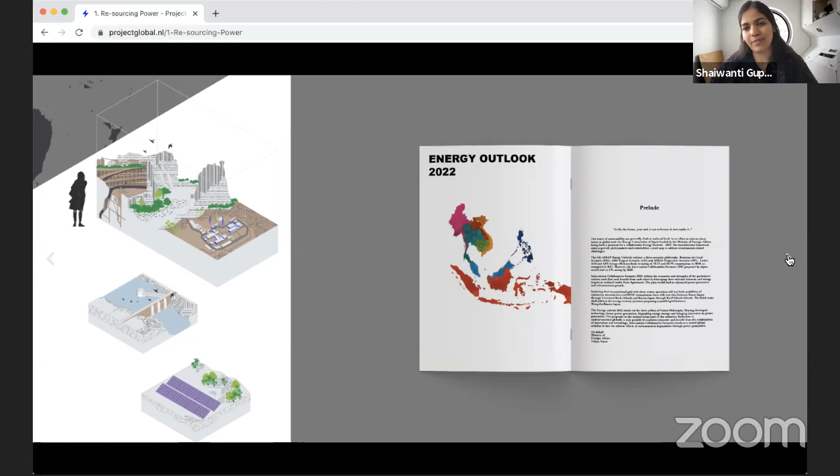So the project sits in the framework of an energy outlook 2022 and brings in the discussion through these models. So what we now do is adopt the voice of Japan and propose ways to deal with an energy crisis in Japan's own diplomatic way. So this report provides an international framework for a roadmap to address these environmental related changes.

The ASEAN report has always looked at three scenarios: the business as usual scenario, the ATS target scenario, and the ASEAN progressive scenario. But Japan proposes an integrated collaborative scenario where countries need to come together to form a better global energy situation.

This is done by proposing the first pilot project of a transnational grid, proposing three routes between Japan and Korea, Japan and Russia, and Japan, Russia, and Mongolia, to look into different modalities through which energy can be transported, looking into questions of security that the nations will come up with. This can help all the nations share their resources and provide for a better energy transmission between countries.

Low carbon emission is one target that needs to be met, and sharing technology becomes the first pillar of this scenario. So Japan proposes to give out its technology for the first nuclear power plant in Australia, which it proposes to locate in the Ranger area in Kakadu National Park, home to the Ranger uranium mine, which suffered losses after the Fukushima disaster. This project can help transfer this technology, help revitalize this uranium mine, and also the area around Kakadu National Park for environmental conservation and other purposes.

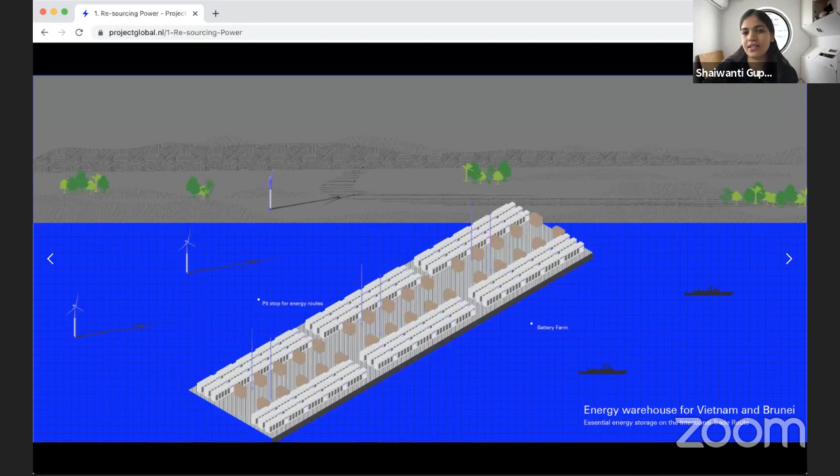Instead, Japan can come in and provide technology and support for building solar farms, and can also help in experimenting with new ways of energy transfer through hydrogen fuel cells. Energy storage also becomes an important question in this discussion, and it can be done by proposing projects of energy warehouses, where Vietnam and Brunei form a very important location between these countries for energy transmission.

There's now a need to bring the world closer, which can be done by providing an innovative solution for a tidal power port in Mexico. As we know, Mexico is looking for new ways and investment in its port to increase its export and import. Japan can help and provide these power ports and experiment with tidal energy.

So this is how the project sits.

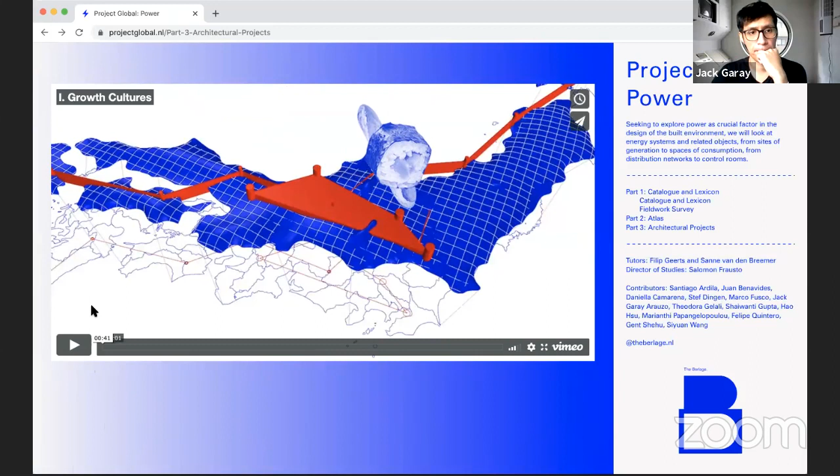Okay, so the next group of four is named Growth Cultures.

On the island, where space is limited, growth as a noun poses a paradox. However, this paradox also stimulates various forms of tackling it. So this group's understanding of growth ranges from its biological connotations, systemic or even philosophical, and ultimately spatial. However, growth also suggests that there are circular processes involved. So to some extent, this group also investigates the metropolitan loopholes so that it can reconnect them back to the systemic loop.

Now we start with Muttsu no Rūto, an Algae Archipelago. Muttsu no Rūto is a Japanese word which means the 6th route, and is basically an appendix of Gokaido, which were the 5 main routes linking Tokyo with other major cities.

Now, what really fascinated me when I was in Tokyo were these in-between gaps. To pierce through Paris is basically to create a boulevard. However, to pierce through Tokyo one simply ought to make a house. These gaps are a consequence of earthquakes. They're a mechanic translation of natural phenomena, basically. However, in a city that is suffocating with signs and edifices, they remain the only breathing pause.

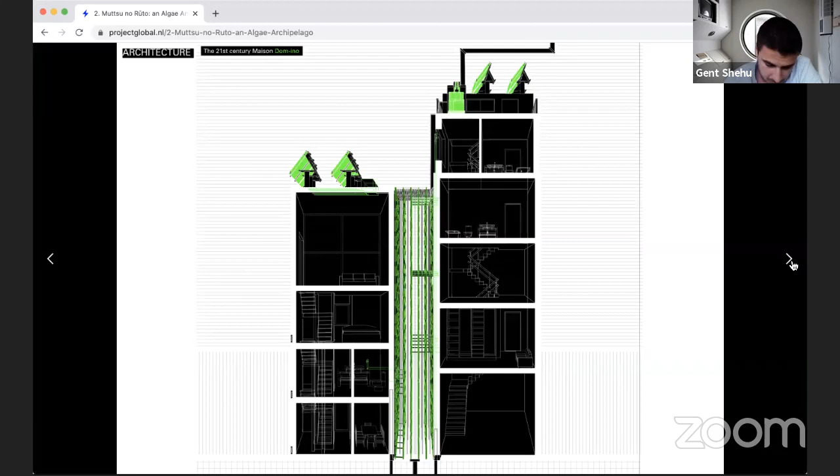Now, this 21st century Maison Dom-ino, well, basically it is with this new consciousness that Tokyo establishes its biological revolution in which photosynthesis serves as the modus operandi and algae as its most adored and loyal plant.

An algae infiltration means that there is a benevolent virus, basically, which enters systems at different stages, only to make them outperform their old industrial mechanisms. Algae systemic identity rests in quote-unquote circular processes, converting what our cities expel into sustainable raw materials and nutrients.

Now these algae curtains are basically made from Photosynthetica, which is a studio which deals with algae. But so basically the originality of this project rests not in its innovative assumptions, but rather integration. So basically all of these phenomena have been proven scientifically.

And the way this project implements itself is from the small scale of architecture, then to the systemic scale, which it links to other systems, and ultimately to the territory of Tokyo.

The way this system basically becomes implemented is in the distant island of Niijima, which is 163 kilometers from Tokyo. However, what is interesting about this island is that it has been a ground for experiments ranging from former launch sites for sounding rockets to today's TEPCO's initiative for sustainable energy developments. It's also interesting that in this island there are 10 to 20 earthquakes with a magnitude of 5 in 1 year.

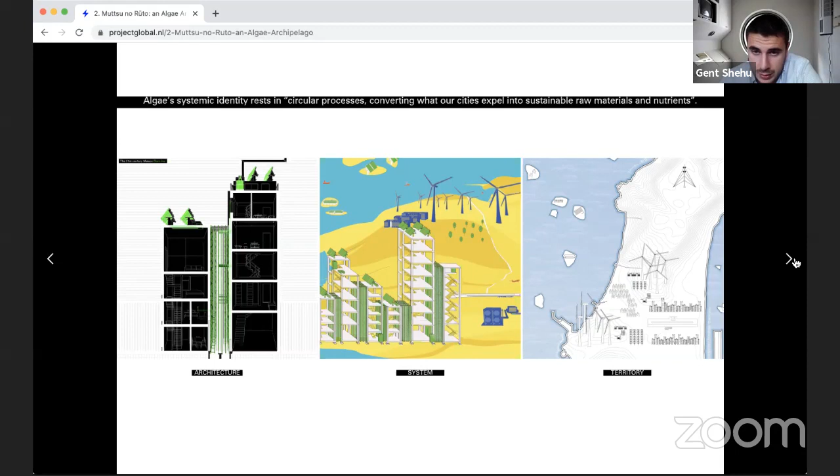This is Niijima island, and we can see how this system can work together. So basically what TEPCO does in Niijima is installment of wind turbines, and then it links to the batteries. But also there is a suggestion to use algae photovoltaics, which also link to the storage of energy. And this system basically becomes part of this algae infiltration, as I say it.

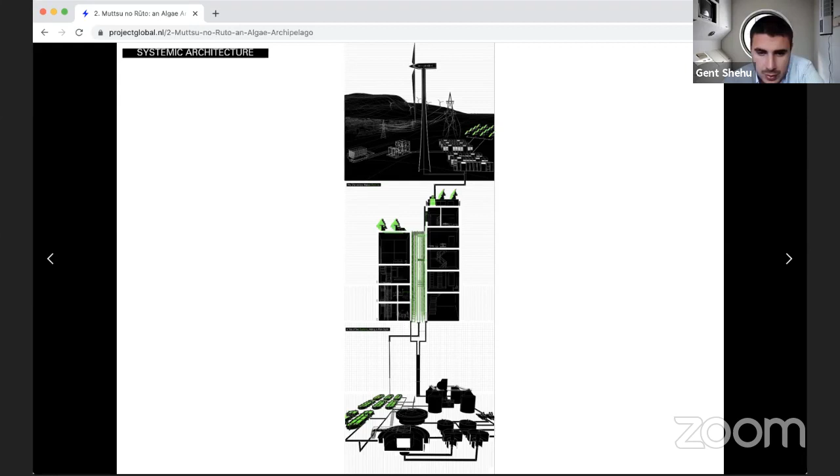Now the systemic architecture means that in order to make this system work, studies suggest that they need to be integrated into major and the general framework of power production or wastewater treatment. So basically the wastewater treatment, it's also very useful to infiltrate algae because it has many environmental benefits, but also it reduces the whole process by 50%. So basically it makes it way easier to treat wastewaters.

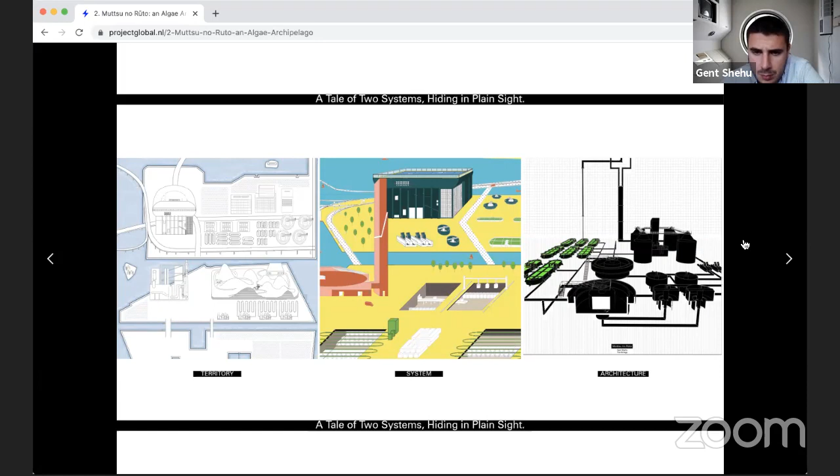Now, it is really interesting how the system actually works in Tokyo, and what would happen if algae infiltrates in this system. Now I call it a tale of two systems hiding in plain sight, because what happens in Japan is usually when we have these wastewater treatment plants, everything happens underground. And what you see above ground is merely parks or tennis courts and people playing.

So in the man-made lands of Tokyo, because basically these are mostly situated in the new man-made sort of islands, which are also used as landfill disposal sites after certain things are being incinerated. So basically in these man-made islands of Tokyo, all kinds of imaginative stories unravel. One might play tennis above the gigantic circular objects of the wastewater facilities.

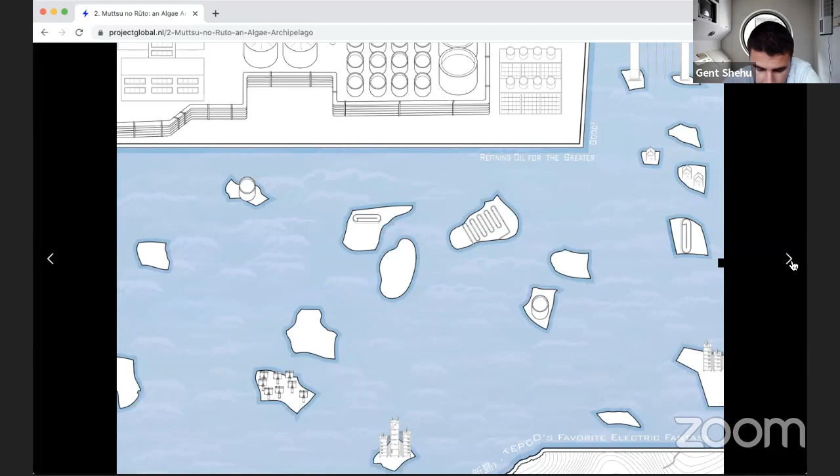Now, the fractal laboratory, the final stage of this project, is nothing less than 1,000 islands dispersed throughout Tokyo Bay, each testing 1,000 strains and providing its necessary ambient. It's an archipelago within an archipelago that tests algae on all possible systemic scenarios, because in a complex organism such as Tokyo, the laboratory becomes a place of multiple simulations.

Now, finally, Muttsu no Rūto considers integration rather than innovation as the basis for urban resilience. It's not about a single system, it's about a multiplicity of them forming a non-hierarchical structure and feeding on the waste of one another. Its extrapolation in 6 basic systems forms the basic framework for the future of Tokyo. In this regard, the delirious Tokyo is a thing of the past. The photosynthetic Tokyo is the ultimate future.

This contribution investigates how Japan utilizes its national natural given of forests, which cover 60% of the country and used to be the center of traditional economy.

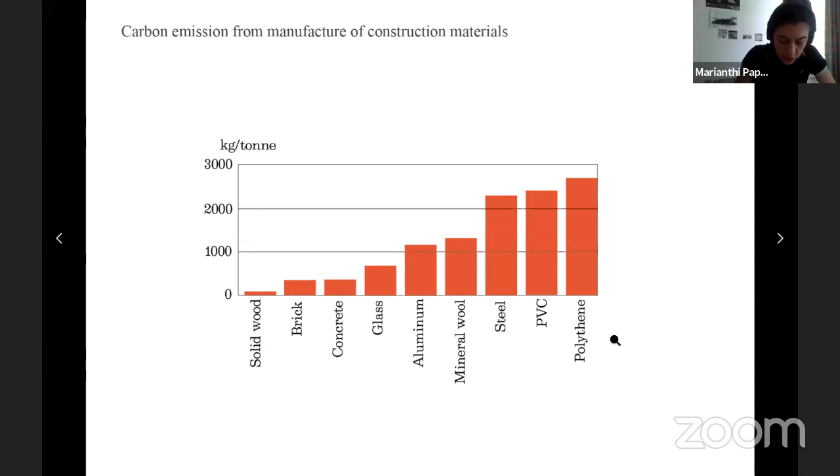Circular economy is not new to Japan as it is linked to traditional ways of living, such as the satoyamas.

Thirdly, if we take a look at the domestic economy and the fact that domestic needs of timber are met by large importation from foreign countries, we assume that this amount could have been produced locally.

Another issue is that Japan has a very living tradition of timber applications and techniques that need to be strongly reframed in the contemporary way.

So the above generates a multifactorial research scheme where opinions and contributions from various experts are much needed. There is need for collaboration and focused research at different levels. This project aims to frame and accommodate such operations in the form of a network dispersed around the country, most particularly in areas with extended national forests and tradition in timber work.

The building program of those institutes is revolved around 4 main fields of research: building techniques, sustainability, design, and production. Each of those 4 fields has relevant labs, research facilities, and workshops. You can see all of them in this diagram: the wood shops, the workshops relevant to design, innovation, circular economy, the labs that deal with marketing and local production, forest management to control the growing rate of forests, and so on.

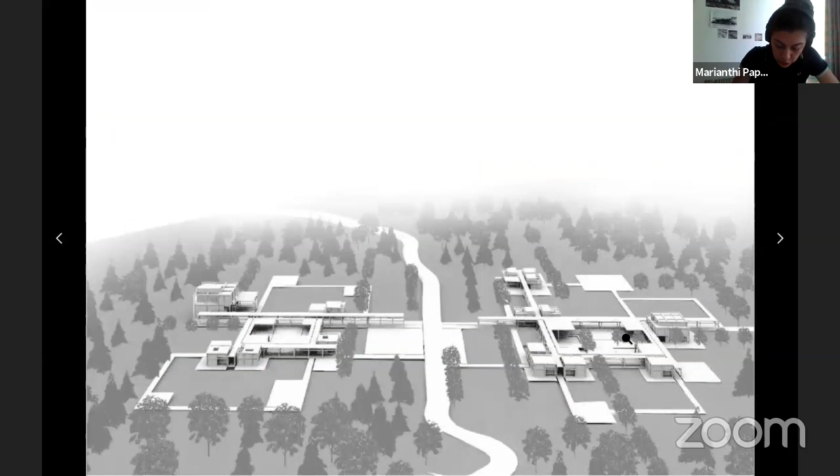The main goal of this master plan was to show relations and intentions rather than provide a detailed master plan—the relation with nature, the kinds of labs and workshops, the idea of a forum, the indication of a campus always in the making are some of the ideas I tried to incorporate here. The campus is clearly divided into 2 parts.

The part of the woodshop, where experts, craftspeople, and apprentices do research by building, and the more laboratorial part, where researchers, architects, designers, forest and energy experts design, strategize, archive, manage, and plan. They are divided for the practical reason of noise, but also because the woodshop generates the rest, therefore it's by itself a very strong sector.

The forum, as the common space of discussion and opinion exchange, is the core of both parts. It's used extensively during summer, spring, and fall, whereas in winter those activities take place in the central buildings of the 2 sections.

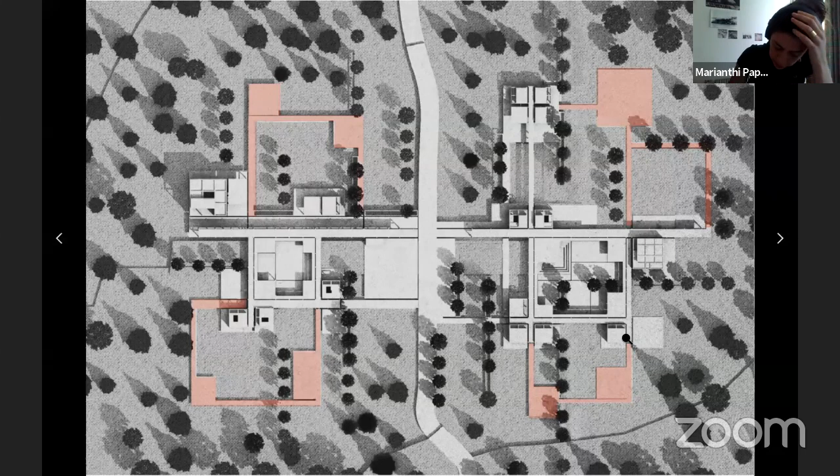The institutes will host local and foreign experts, researchers, and practitioners that will organize various annual thematics relevant to the timber industry. Those thematics will first try to frame the local issues and then connect with a network of other cities to exchange knowledge, statistics, and conclusions.

The network is also not fixed, and it can expand according to the need of additional locations. I'm so sorry, I have some problems controlling the presentation.

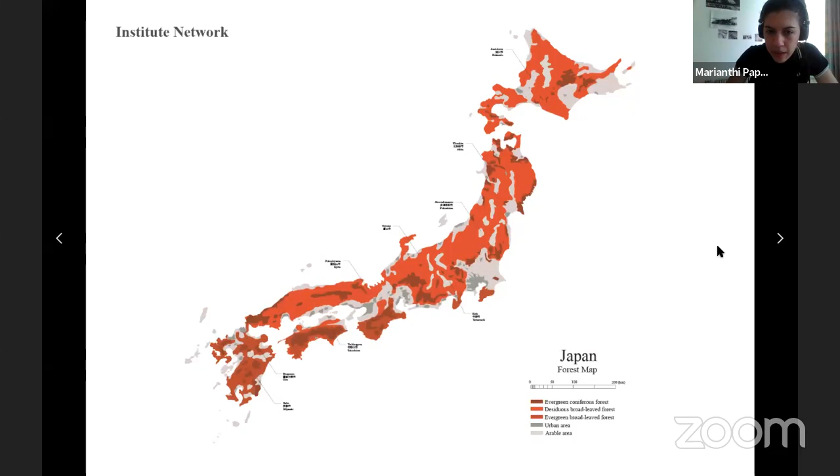Do you want me to continue controlling your presentation? No, I mean, I could not control it properly, so I don't know if I made sense. Maybe the files are very heavy, I'm not sure what's going on, but I couldn't change them. That's the problem, so I don't know what else it could be. Did you show all the slides you wanted to show? Yeah, but I wanted to show them in a proper way, and it couldn't happen. No, okay, don't worry.

So we go on right to the next one, right? Yeah.

So the next project is mine, and it's called Shokuniku.

The Shokuniku market in Shinagawa is the only slaughterhouse in Tokyo, which means it supplies meat to the whole Tokyo area. Its location is quite central, close to Shinagawa train station, surrounded by shopping areas and high-rise office buildings.

The removal of Tsukiji market makes me think of the same question for Shokuniku market. Tsukiji was the largest fish market, located in the center of Tokyo. It was removed to Toyosu in 2018, to a relatively outer space. Here are some pictures of Tsukiji market and Toyosu.

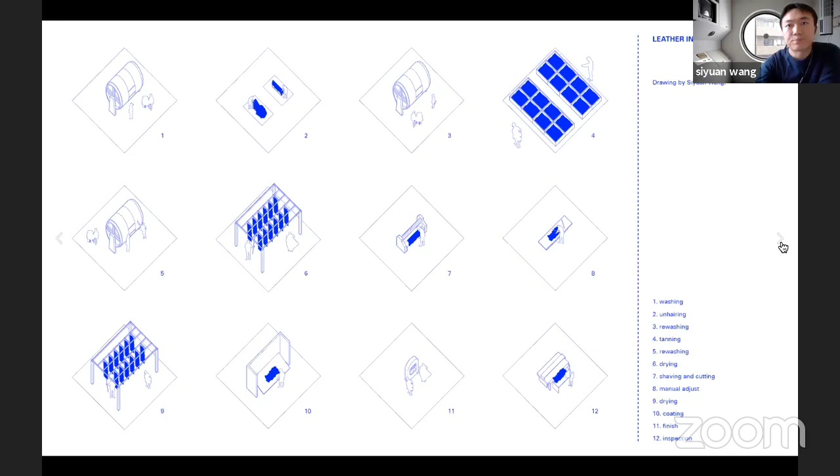I also searched some information about the slaughterhouse. It's too bloody, so I blurred some of it. The key image is how they skin the cattle, and there is a chamber to collect the leathers.

This is a proposal for the combination between the slaughterhouse and the leather factory, from the perspective of logistic efficiency between different industries. I think it would be good to bring the slaughterhouse to make a combination with the leather industry in Sumida Ward. Based on the situation of the slaughterhouse and leather factories in Tokyo, I'd like to bring the leather industry close to the slaughterhouse to make a new Shokuniku market, named Shin Shokuniku.

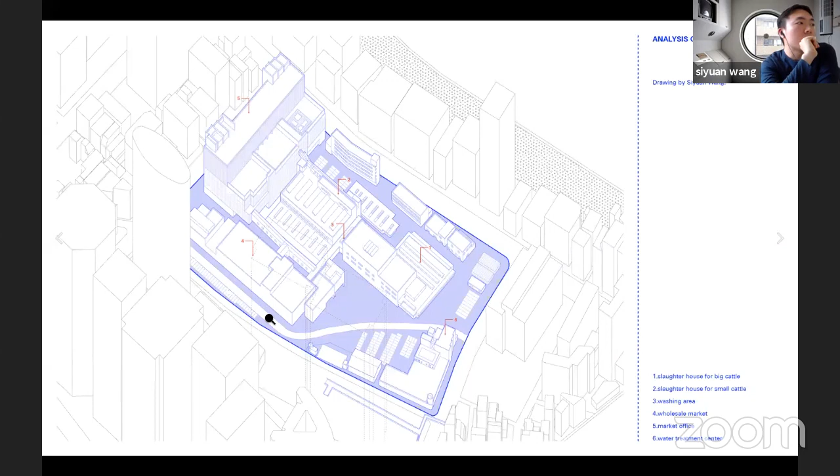For the existing Shokuniku market, there are a slaughterhouse, washing area, market, office, and water treatment center. Considering the high density in Shinagawa Ward, it's hard to develop a new block for the leather industry, so I add the factories on top of the existing slaughterhouse. The factory is connected with the slaughterhouse in the washing area, where they can share water facilities and transport leathers efficiently. The water treatment center of the slaughterhouse would also be shared.

I add meat and leather retail stores to this project. By extending the existing skyways, the stores could be connected with the shopping mall and office buildings around the slaughterhouse. I also attached a visitor path so that people could learn about the process of the slaughterhouse and leather making.

This is an exploded diagram showing the function composition of the slaughterhouse and the leather factory. Here are some perspectives outside of it, showing how people visit the leather factory and watch it.

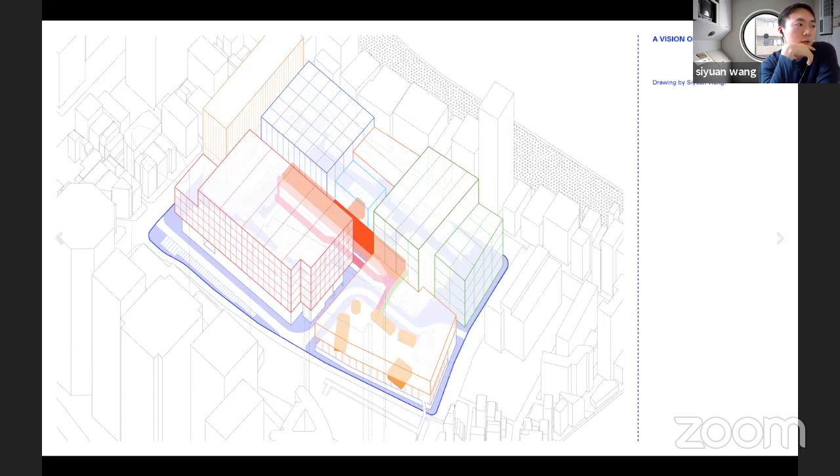Compared with the high-rise buildings around it, the slaughterhouse is quite a low-density block. This gives the possibility to add more related functions to it. So I would give a future vision of making this block a mass of different slaughter-related industries. Yeah, that's my project. Thank you.

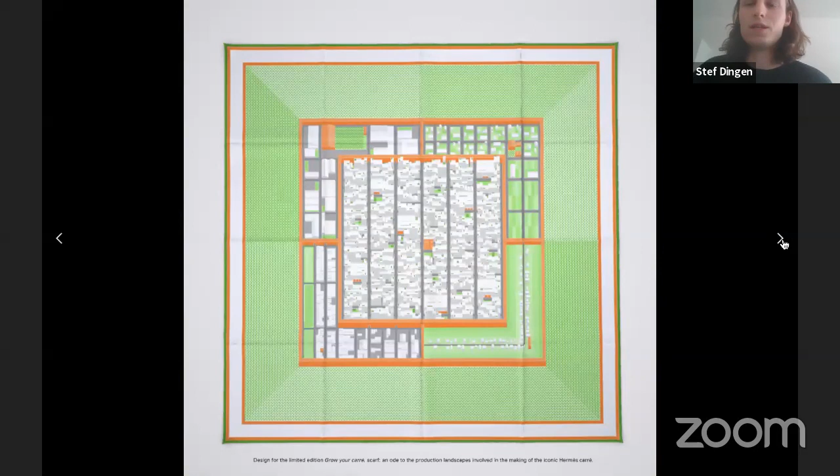Grow Your Carré is at once an evocation, giving insight into the very real disconnect between luxury shoppers in Tokyo and the distant, intensive making of their desired goods somewhere else, as well as a serious solution utilizing existing knowledge, traditional skill, and available space in tackling an admittedly small part of manufacturing locally. By overlapping production and consumption landscapes, Grow Your Carré stimulates an awareness of the scale of this operation and aims to positively contribute to fostering local craftsmanship and a greener inner city, through a combination of an aesthetic language typical for Hermès scarves, and the abstraction of production landscapes within a long-standing ideal city tradition. That which may seem frivolous is dealt with in a highly rational way, without losing sight of the pleasure involved with quality products.

It connects the scale of the urban and the landscape, that of the interior, and finally the object. As such, Grow Your Carré is also an encouragement to look beyond the superficial and to find beauty in the complexities underlying our consumption patterns across a multitude of scales. Thank you.

Do you know Family Mart? Have you ever been to a Family Mart? No? Don't worry, you can find at least 3 Family Marts within 5 minutes walking in Tokyo. It's open 24 hours a day. Anything you can imagine for daily use, you will find it in Family Mart, so don't hesitate, let's go.

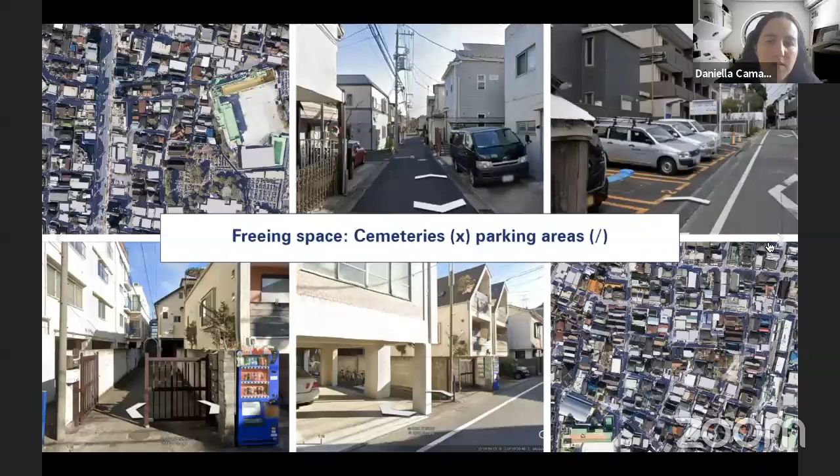At first sight, it might seem that there is no open space in current residential areas, but cemeteries and parking areas act as the back garden of houses. However, walking through their streets, we can start finding small parks that begin to emerge. These parks serve as places to fulfill the strategy for evacuation areas according to the Disaster Prevention Plan, together with the Urban Park Act, which started in 1956. These parks are not much but surfaces with lamps and benches.

According to this action plan for 2020, it consists of advancing projects aimed at strengthening the functions of these metropolitan parks, key as disaster management. So the aim of the project is to frame open space as a structural device, looking for the opportunity to open a centrality within the low-rise residential high-density neighborhoods.

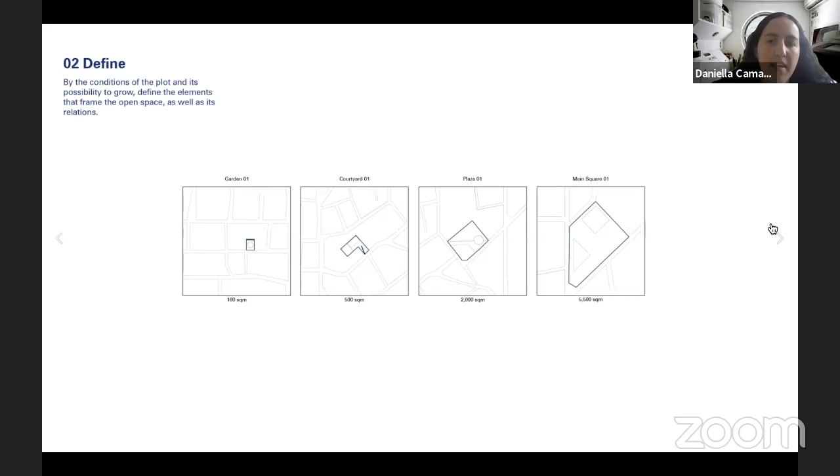The second part is that we're going to start defining these plots by the conditions of the plot and its possibility to grow, and its role in the disaster prevention plan. Technical details are added per system.

First of all, the water garden, which is 160 square meters. It consists of a rainwater collection, which later connects to the main path, a drinking fountain, and a light feature that is produced with the electricity of the plaza.

The second one, the courtyard, is 500 square meters, composed of a rainwater collection pond, seasonal trees, a contemplation slope, and a light feature that is also fed by the plaza.

The third one is the plaza, which is 2,000 square meters, where we find a pavilion with solar panels, where the electricity goes to the inverters and batteries to later be distributed to the courtyard and the garden, a rainwater collection pond, a drinking fountain, seasonal trees, and gathering areas.

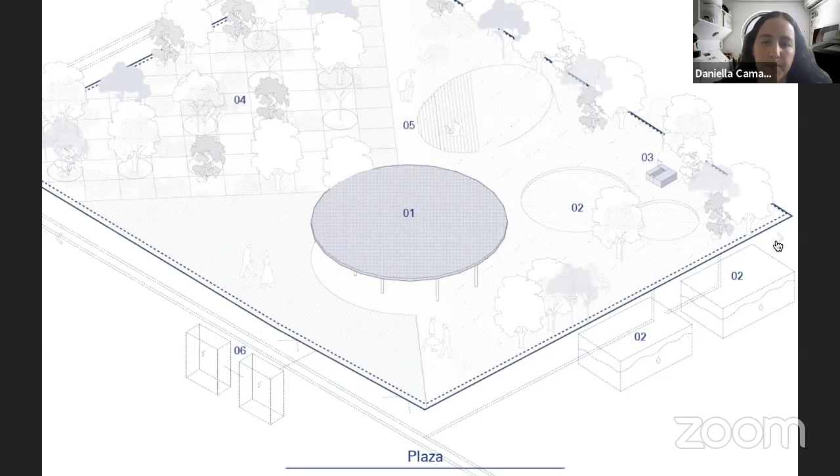And the main square of 5,500 square meters, which contains a pavilion, a geothermal productive and educational area, pumped from geothermal energy, which later connects to the main channel and rainwater collections, and a gathering area.

Making a sequential path connected with existing evacuation paths according to the disaster prevention plan, and adding them with water harvesting paths and electricity production and distribution within the parks, they create a network where elements join together.

The notion of collective structures will allow varieties to coexist and integrate in a comprehensive urban strategy, where shared efficiency, distribution, and generation are considered, which will later be spread around Tokyo's residential area, where individual structures are accumulated in a quantitative manner.

Looking into Tokyo's residential area, freeing its space for its residents' livability and for the city's security, forming an alternative for dealing with collectivity.

Hello, my project is Meta Billboards, and it's basically a system of billboards powered by the energy industry stakeholders.

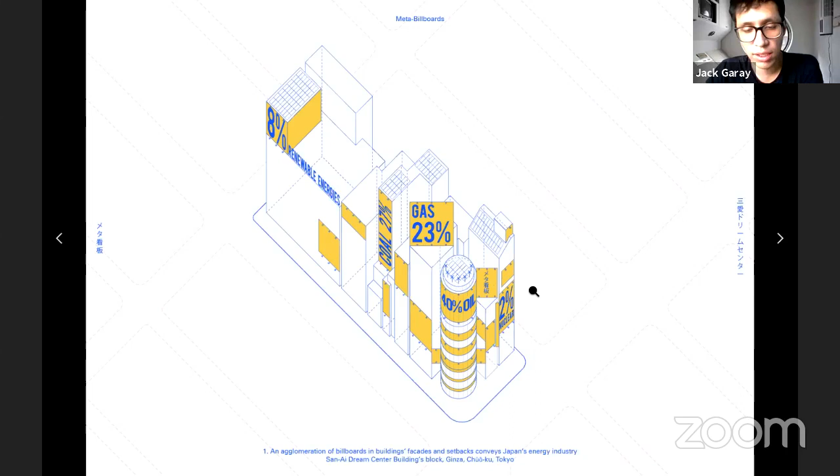The first one is in Ginza. This is the San-Ai Dream Center building, which is advertised as a building that is 100% a billboard, and it's powered by renewable energies. That's why it has solar panels and even wind generation on the roof.

But then, of course, Ginza is a collection of buildings with setbacks and different heights, but all of them have this second layer of billboards on top, taking advantage of the surface and the intricate spaces that they leave behind in between them.

And this one in particular is a speculation on the different sources of energy in Japan, comparing how much they represent in the whole energy consumption, using the billboards.

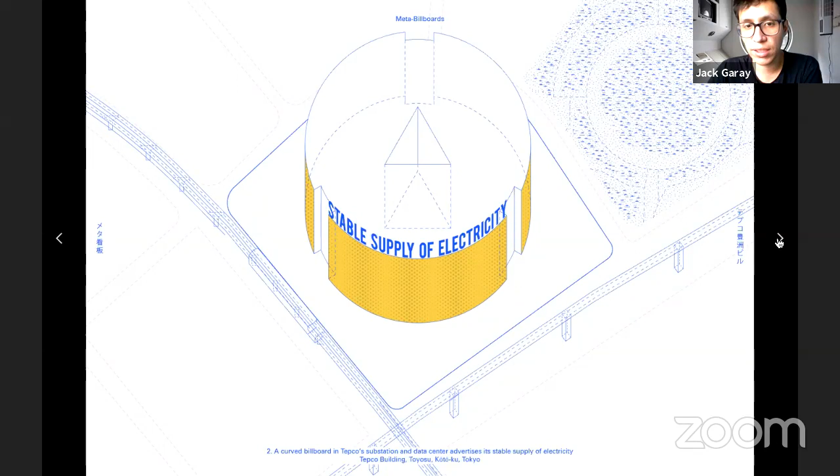The next one is the TEPCO substation and data center, the TEPCO building in Toyosu. This one speculates on how the whole building could be transformed into an LED screen billboard, advertising the discourse behind the corporation, which in this case would be the stable supply of electricity, the smart meters, or the activities that TEPCO is taking into place.

The following is the Fukushima Daiichi nuclear power plant. During its decommission and the putting into place of safety measures, it becomes a visual campaign in itself, with billboards, signs and symbols, with tourists visiting the place, and the Japanese government aiming to convey that the nuclear power plants coming back to Japan are safe now. So in a way, the site itself becomes a political conveyor of messages.

The following is a kind of counter-reaction to the previous one. At the site of TEPCO's Decommissioning Archive Center, the former TEPCO Museum, a giant billboard is installed in the outskirts of the town of Tomioka, less than 5 kilometers from Fukushima. This campaign goes not only against nuclear power but also against nuclear experimentation and usage in other countries.

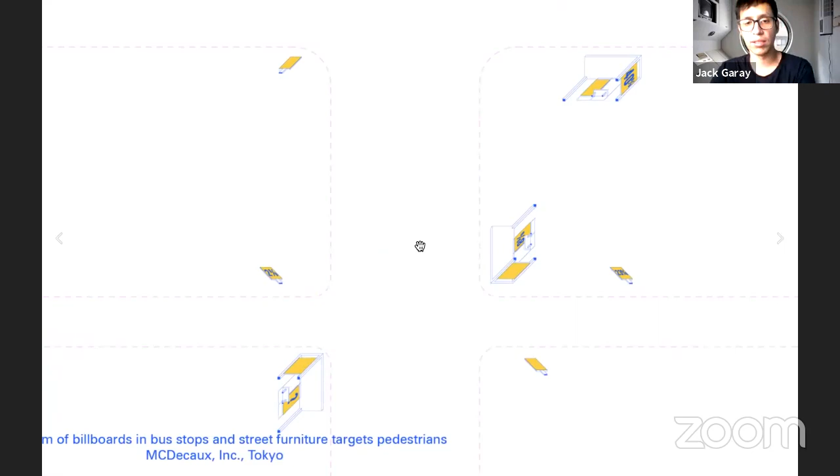In this case, I analyzed MCDecaux as the Japanese branch of JCDecaux, the bigger street furniture advertiser in the world, and how they occupy these kinds of corners, in-between spaces, and public spaces in cities. They have become extensively known in almost every country.

The next one is a system of mobile billboards on trucks that also use the truck's sound as a message conveyor. In this case, it's speculation on the development of the T-Green Multi-Solar, a new kind of facade, from a company that develops facades and systems to generate power through solar energy.

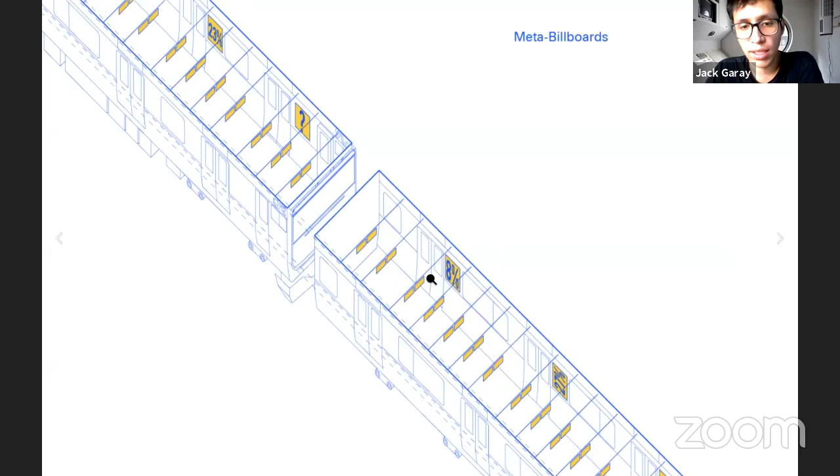Then again, the system focuses on printed banners in the Yamanote Line, but in general on train stations and public transportation in Japan, and how these carriages have become a place where different sorts of advertising happen, from events to products to services, but in this case a more relevant discussion around energy production.

Finally, mascots in Japan are a cute and happy part of the culture, but they have also become a political tool, used by governments and local governments to engage the public in certain aspects. In this case, the character of Pikachu, related to electricity, became part of a campaign all over the world, protesting Japan's financing of coal plants and fossil fuels.

So in a way... I'm sorry, Jack, I need to interrupt. All of you are taking way too much time in presentation. It's already 4:15, and we would like to be able to have a discussion about this work. At this moment, it's not possible, so please wrap up your presentation.

Just to conclude, the image is the Ginza block, a kind of blank notebook where all these messages are conveyed, and in a way the architecture becomes... the billboards become the architecture of persuasion. Yep, that's it.

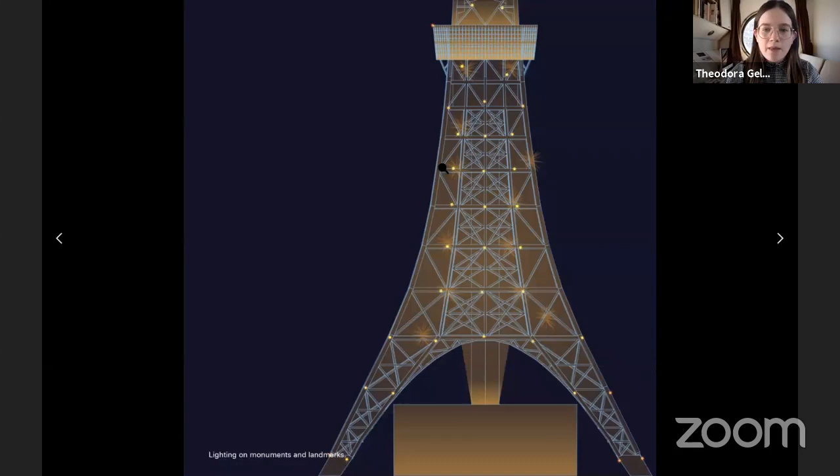Continuing, lighting up a monument or landmark links mainly to entertainment reasons, attracting more people to the site. It creates a feeling of social safety and cohesion in the city, while also creating an identity landmark for the people. Apart from being an attractive type of lighting, it turns out to be extremely wasteful because of the surface it covers and its use, sometimes all day long.

Street lights and street lamps get lost in the center of Tokyo. Being part of the infrastructure, they hold a useful task we all know, but actually noticing them becomes difficult for pedestrians and even dangerous for motorists and other street users.

The image of Tokyo, as we know it, shows digital billboards causing high levels of light pollution, which is a main point of interest. The intensity of light from the thousands of LEDs used on digital billboards is much greater than lighting from conventional signs. Traditional measures of brightness don't accurately reflect this intensity, which makes the digital billboards stand out from their surroundings.

Street signs and street lamps easily cause light trespass, unwanted light intruding into a person's property or area of concern. Not being places of high interest to tourists, these can also be found in near-dark areas and secondary streets, mainly forming a network of dimmer light in Tokyo. Finally, traditional lighting comes from smaller houses or shops, on a smaller scale. These offer a closer look at the traditional light setting of Japan, forming more interesting shadows and engaging more with the darkness.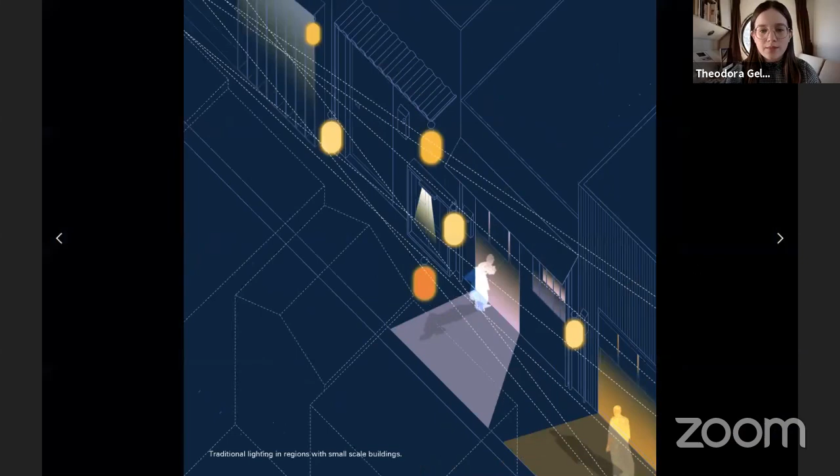In our collective imagination, cities are meant to be bright, but studies show that much light can be detrimental to health. So are cities actually getting too bright for our own good? That's the question. Even though digital billboards use energy-efficient LED lights, with Japan using the latest technology, the sheer number of lights in a single sign and the need for billboards to be brightly lit to be seen during daylight hours turns them into energy hogs.

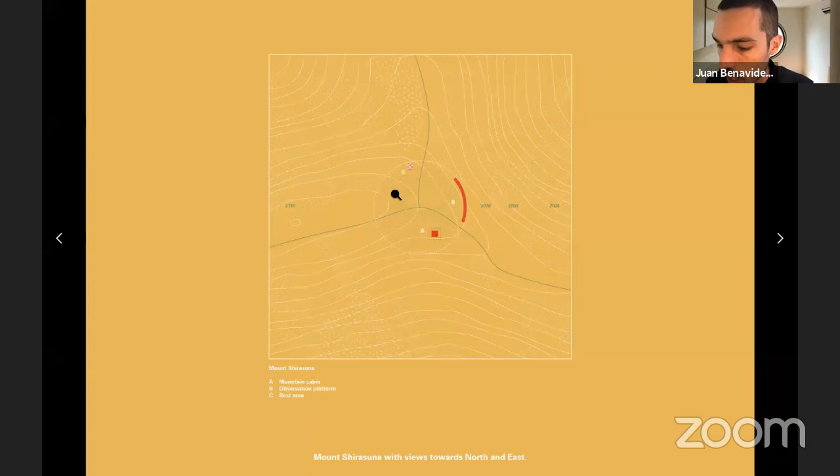The project proposes a panorama in a place from where to look at the energy systems. It is a model fragmented into 3 didactic objects: a mountain cabin, a viewing platform, and a rest area, all scattered within an invisible circle that departs from the shared coordinate.

Views are framed inside the mountain cabin, and tower binoculars are directly pointing to the horizon, suggesting the possibility of looking at a nuclear power plant from afar.

The electric infrastructure of Japan comprises 2 incompatible power grids: the West, that built its grid based on the American 60 Hz system, and the East, that built its grids based on the German 50 Hz system.

While there are enough power plants in each of the grids to supply electricity if there are spikes in demand or outages, the fragility of the system is evidenced when there is a big unplanned shortage of power. While the idea of a unified national frequency is economically and politically unreachable, Japan can only hope to improve and extend their conversion capacity between grids and simultaneously make an effort to conserve electricity.

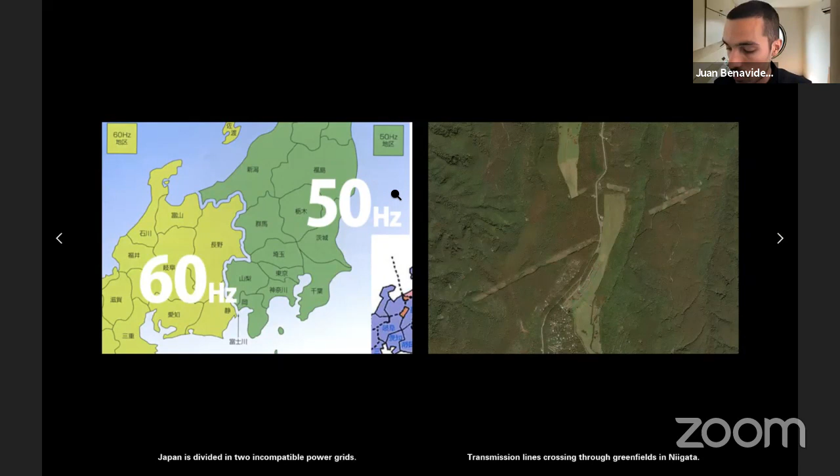The Electricity Expressway evokes the issue of the imminent disaster. It is a prototypical strategy to bring stability to the grid and expand the inter-area power wheeling initiative promoted by TEPCO and Chubu.

The expressway carries 2 transmission lines, one from each half, with transmission pylons every 300 meters that arrive to the new Nagano Tokyo Frequency Converter Station.

A series of renewables, such as power plants integrated to large-scale storage facilities, systems that countermeasure frequency control and balance daily demand and supply.

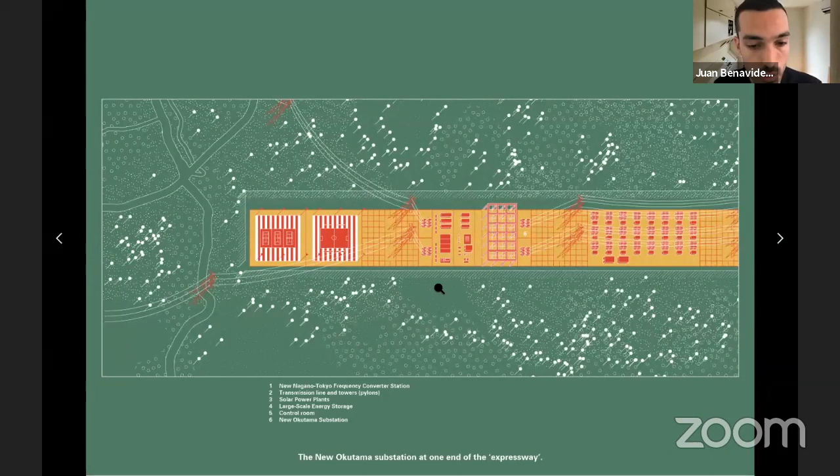A new Okutama substation at one end of the expressway, and a new Kawakami expressway substation located on the other side of the expressway.

The southernmost point of Japan is a flat table reef comprised of 2 rocks that are typically visible 90 centimeters above the surface of the water.

The island of Okinotorishima, with the zip code registered in the Tokyo Prefecture, is an incredibly ambitious project that reflects the country's effort to sustain a territory and the benefits that come with it.

The small rocks entitle Japan to 400,000 square kilometers of maritime territory, a seabed that is believed to be rich in minerals and gas.

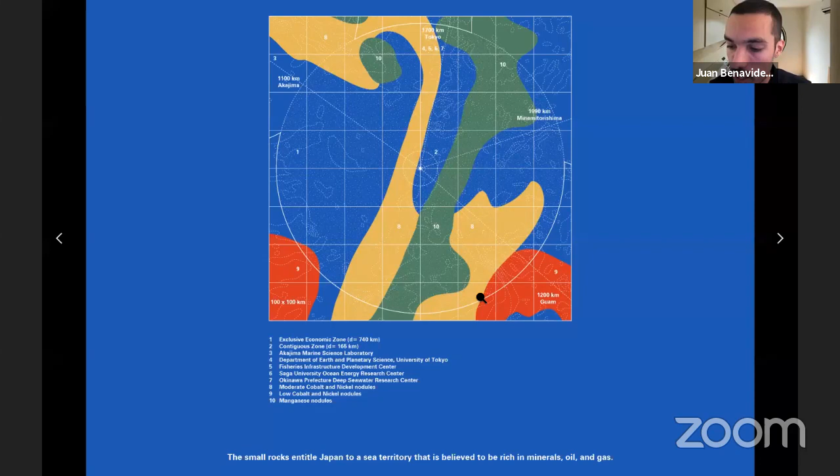Consequently, over the last 50 years, Japan has taken a series of actions for the purpose of islandization, including a lighthouse, an observatory base, a maritime research and weather facility, and a quay to allow large vessels to dock.

With facilities in the neighboring Akajima and Tokyo, it has spent large amounts of money on research for breeding coral reefs, and sent out various ways that could turn Okinotorishima into a natural artificial island.

But perhaps the most ambitious of them all is constructing an ocean thermal energy conversion plant that utilizes the differences in temperatures in the sea to generate electricity.

The Island of Ambitions is an index, a master plan as if everything that was ever suggested would happen. On stage 1, the artificial bank for coral breeding is implemented.

In the middle, dividing the atoll in 2 halves, the sediment control islands direct the growth and spreading of the coral towards the west. Construction for the OTEC begins with a depth of 900 meters.

Stage 2 contemplates the first artificial islet, and installing houses for human habitation and areas for aquafarming are delineated.

For stage 3, Okinotorishima has proved economic activity and introduces accommodation for tourists, a heliport, and deep sea mining facilities to extract oil and gas, as sea bottom resources have successfully been identified after a years-long survey.

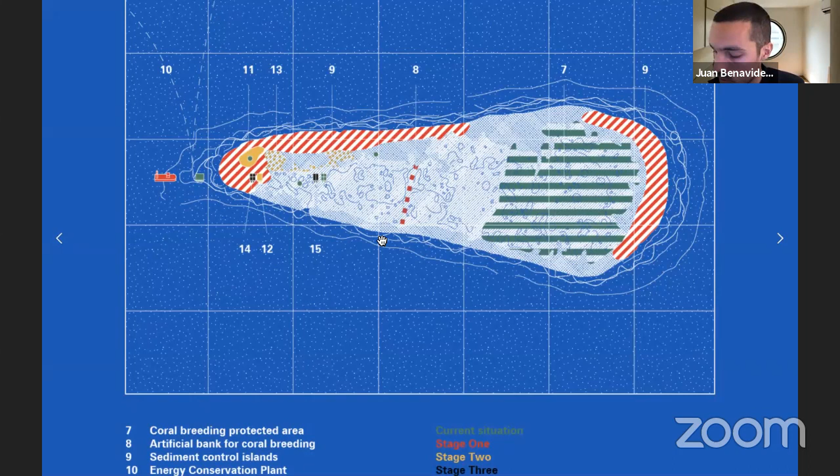The result is a sectional characteristic of all buildings forming a line in a kind of umbilical display. Through submarine HVDC cables, the power plant feeds the rest of the island.

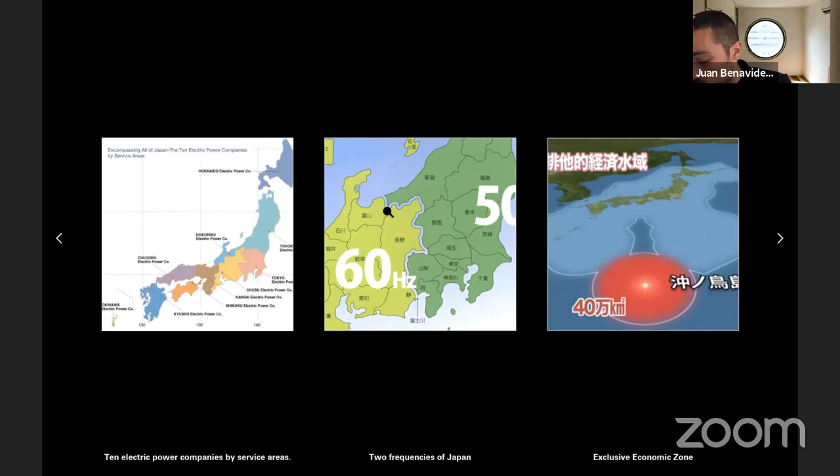The 3 territorial hinterlands of power intend to bring physicality to the invisible lines by using as a vehicle, as a tool, the topics and discussions these specific points trigger.

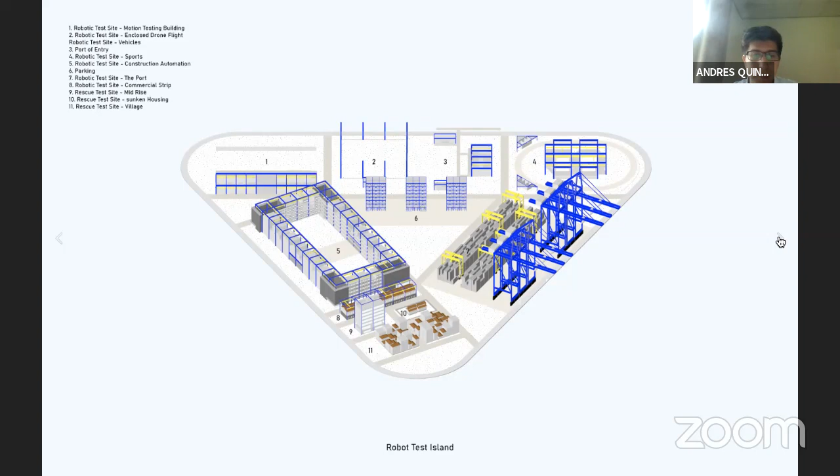As you can see, the context is filled by some amusement parks and industrial artificial islands that already exist. The island has a program of facilities which try to make up for the lack of automation in these industries.

Within the context, the first one, which I think is the most important, is the motion testing building, which linearly and programmatically runs 3 parallel lines: one with the control rooms, the second with motion testing obstacles and water tank testing, and the third with outdoor testing, which also provides a series of obstacles for robots.

The blue structure is a common language that runs across all buildings with the yellow crane. The yellow crane not only supplies the construction for the building itself, but afterwards works as a flexible tool for adaptation and dynamism.

Here we can see a section of this robot test island, where human and robot are dependent on each other.

Here is the drone flight cover, an enclosed test field which allows for 24/7 flights, with no issues regarding flight restrictions.

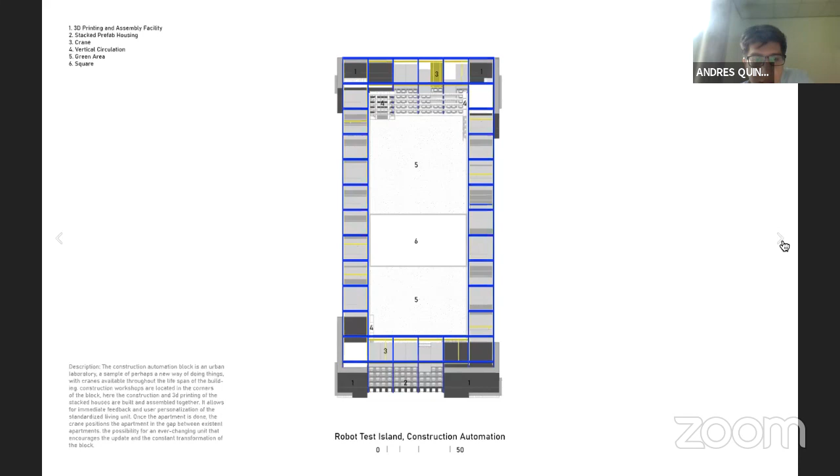This is the construction automation block, whose 4 corners tend to provide stacked housing, making it dynamic and always under construction. This is the detail of the plan where they would 3D print the stacked houses.

The automated parking tower, as an object of the urban fabric of Tokyo. The port mock-up, which tends to provide space for the testing of all these new technologies in port, to make it more efficient.

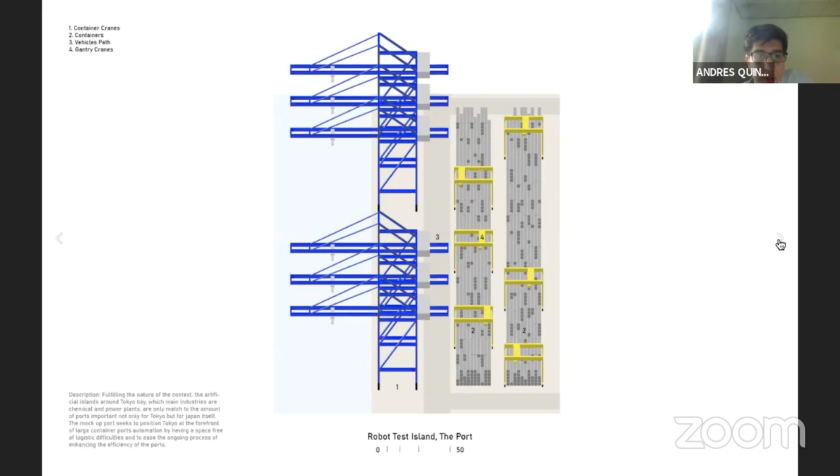The commercial strip for hospitality. Here is the commercial strip and how the robots will supply all these services.

The mid-rise mock-up, the sunken housing, and the village mock-up will be integrated not only to house all the visitors and workers of the island, but also to run inspections and rescue missions.

To conclude, the island fully embraces automation, bridging the process from testing to real life by fading the division line, into a project where direct feedback enhances and speeds up the development of new technologies.

Automating the city rapidly might mean higher energy consumption, but it improves exponentially the efficiency of systems by mitigating human errors. In the long term, it might be the only solution to sustain demand by having the opportunity to produce 24/7. Automation is the end of day and night, of exhaustion, of sleep — a city which is actively producing all day, all year.

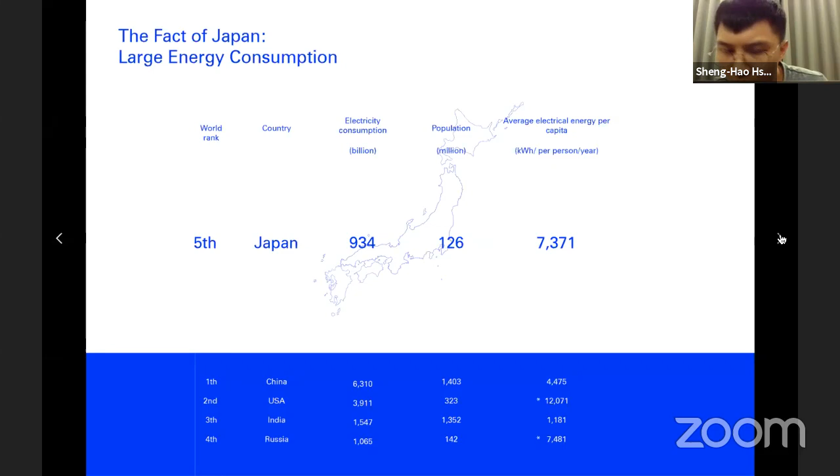From several aspects, we can understand that vending machines are essential in Japan. Most importantly, these machines have already become a system merged into Japan's society. A vending machine is like a vehicle which could provide certain things insufficient in an area. So this leads to the question of how to utilize these vending machines more efficiently and what role these existing systems could play.

To answer these questions, I chose Kasama-shi as an example to see what these existing systems could be. Kasama is a countryside town near Tokyo, 1.5 hours away by transportation. But the town faces a problem like most Tokyo satellite towns: depopulation and aging. So the Kasama mayor's policy aims to build a regional healthcare center to deal with medical demands from old and young people.

So for this example, vending machines could be the vehicle for providing medical services, being part of the mayor's practical strategy.

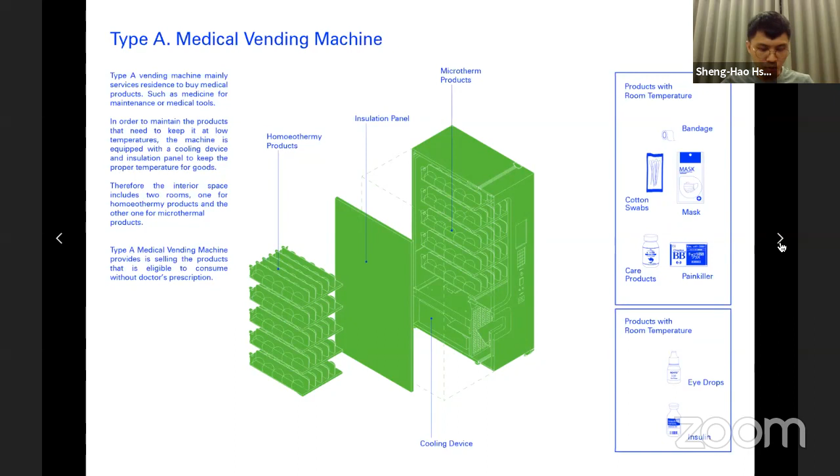Here I'm going to introduce three types of medical vending machines. Type A mainly provides the service of selling medical products to locals, like masks and painkillers. It works like a small pharmacy and has space installed for room temperature and low temperature products.

Type B is an automatic dispensing machine mainly providing medicines to patients who have certain demands, such as chronic conditions or fever. Patients could buy in different ways depending on their demands, like 3-day packages or 2-week packages.

Since it sells medicines that should be regulated, using the machine is more strict. Using the machine requires attaching a personal health ID card and doctor prescriptions.

Type C is like a small health hub, which could automatically examine a user's body conditions like height, weight, and blood pressure. Another function is that it's also equipped with a system to draw and test blood. The user's health condition will be printed immediately and sent directly to the doctor.

Depending on type, each vending machine is distributed with different numbers, based on its functions and what distance is comfortable for an elderly person to reach certain machines. For type B, it might take about 50 meters for an elderly person to reach, and so on.

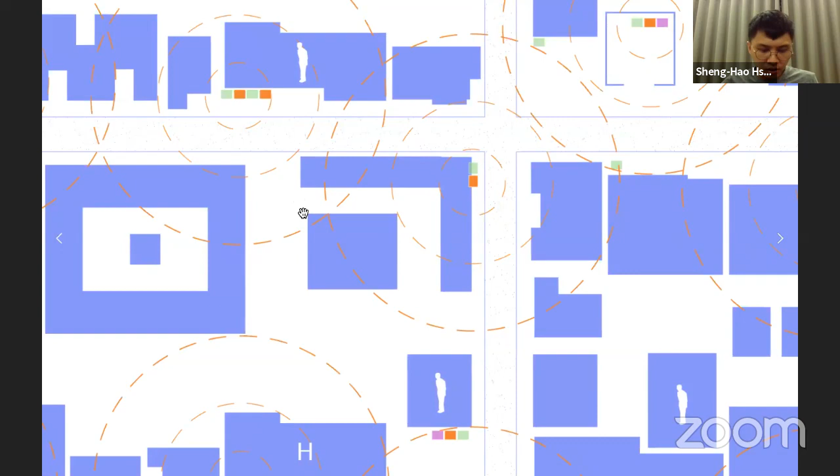Basically type A is a general one, with more numbers and wider distribution. For type B, besides distance, it could be placed near people who have special demands, like elderly or disabled people, or close to a hospital or clinic to be like an attached facility.

Since it also has the function to record patients' information, each machine is also connected to each other and with type C as well.

For type C, it's a medical hub, so it has virtual functions to connect to each type of machine, and also links between individual patients and hospitals. So it's convenient to use a phone or laptop to book or check products and services.

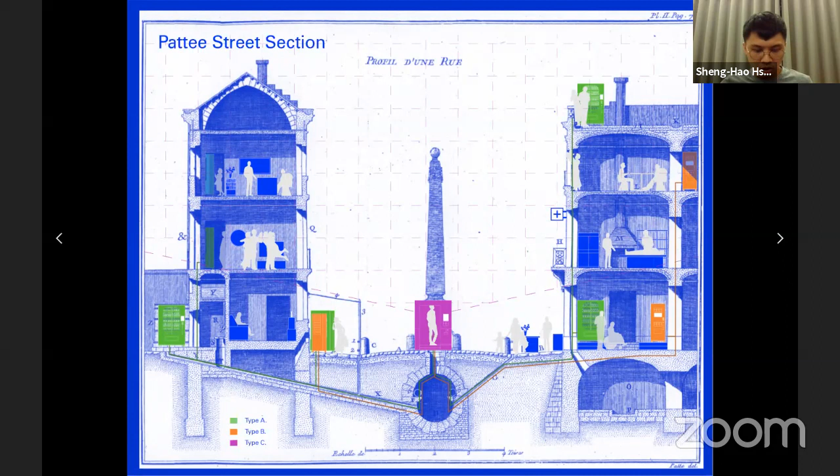Finally, if these existing systems could work efficiently, they could be linked in a new way - a new kind of social services system everywhere, such as the Pattee, depending on the local demand to assign tasks to the vending machines. That's about the whole project. Thank you.

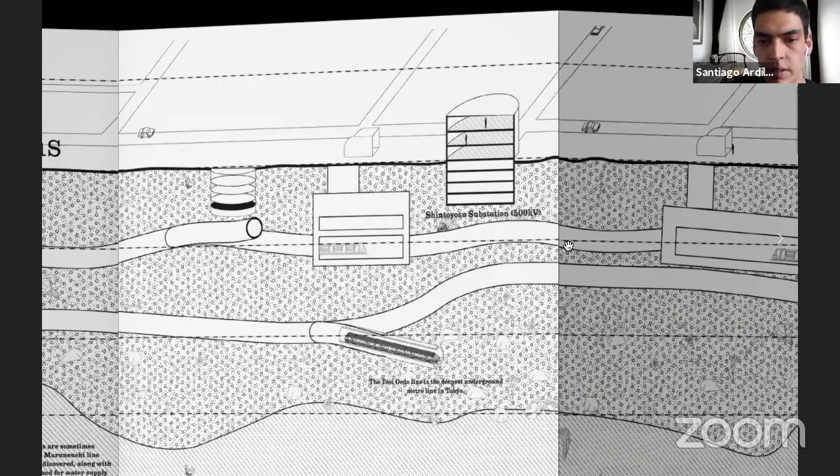Daishindo, which translates to deep underground, is a land use law enacted in the year 2000 for the metropolitan area of Tokyo, allowing public use of underground area below 40 meters for building roads, sewage removal and drainage, electricity lines, tunnels or rivers, without giving prior notice to the landowner above. The constant competition for land in Tokyo leaves developers no choice but to build below surface as much as technology allows, because the root system of a city is invisible from street level, and the quality of the soil is uncertain.

So after this starting point of the mini atlas, the main goal of the project is to classify case studies into three categories: the first is half buried, the second is ground level, and the third is buildings completely buried. The prototypes are classified by their relation with the surface, because it's the main conditioner of an object. A building level with the ground is different from a half buried or fully buried one, as each has different deficiencies in ventilation and daylight, implying different spatial conditions.

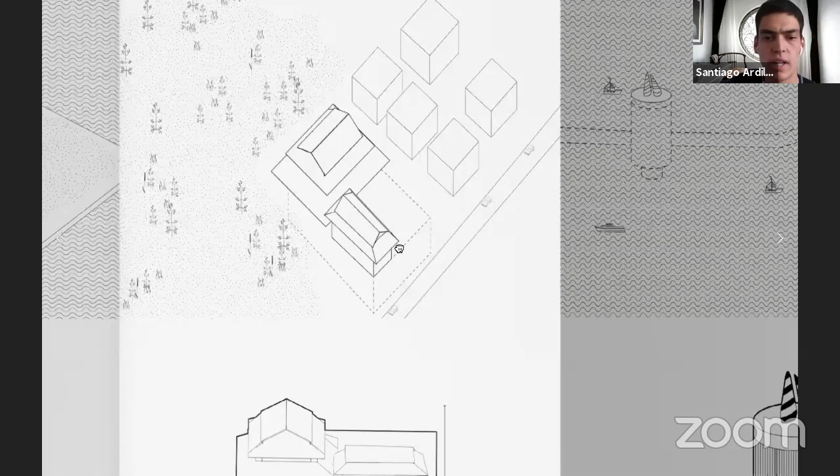After doing this catalog, I speculated one prototype for each of the groups. This is the first prototype: the Shintoyosu substation, a TEPCO station in an urban area, previously shown. Then there's the Koyosan substation, also in an urban area, an electricity substation built under a Buddhist temple. The third is the Kaze no Tou, the ventilation tower of the Aqualine in Kawasaki, a man-made island floating in the middle of the Aqualine. And then this is my speculation, a project that is an artificial speleology prototype.

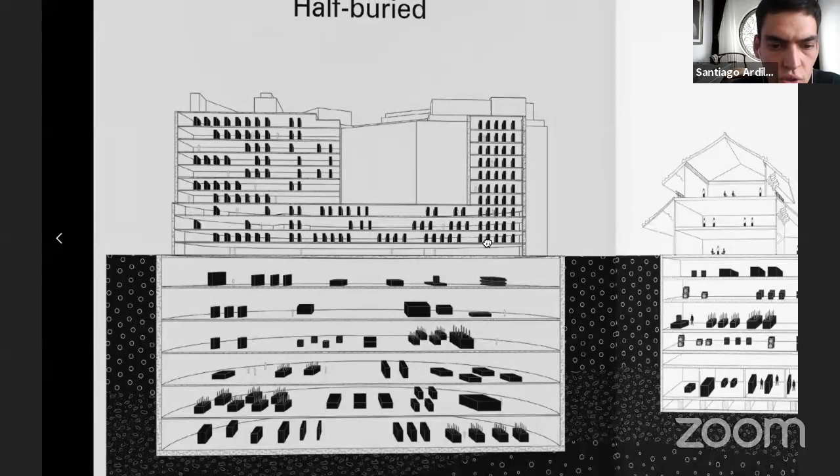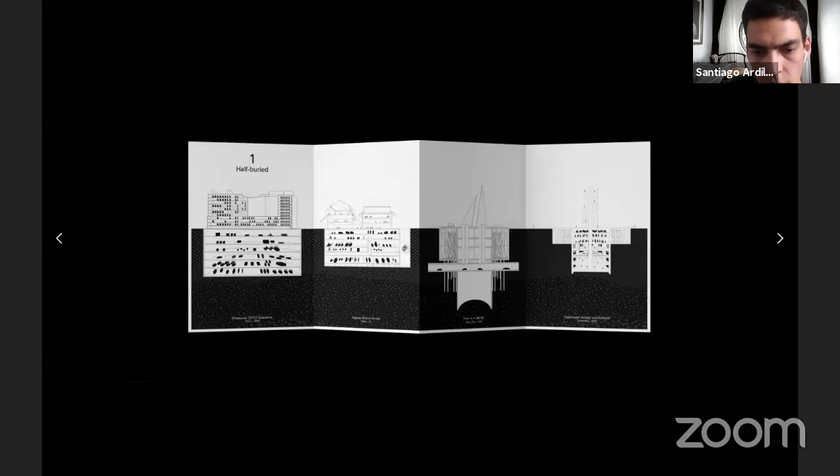To get into detail with these buildings, I developed a section that shows the contrast between the uses. The building is half buried and half underground, with different uses. This one is a data center on top, and underground it has the electricity substation. For the Koyosan temple, it's a Buddhist temple on top, and below is the transmission power line. Then the Kaze no Tou is the ventilation tower that helps ventilate the highway that runs under the Aqualine with this massive structure.

Then this is the proposal to have an underwater ryokan and pachinko, where there is a ventilation tower that serves as a viewpoint, the pachinko is located in the darkest area of the building, and the ryokan is underwater with a panoramic view. Then the second group is the ground level category, with the Kasukabe underground discharge channel.

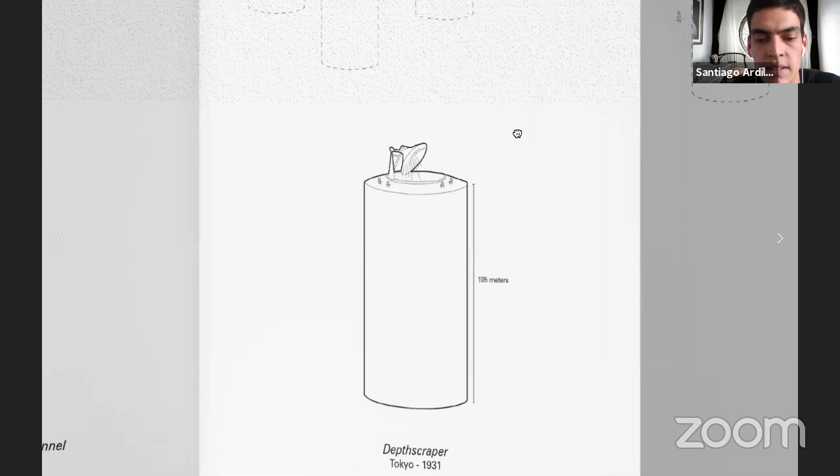This channel helps protect Tokyo from floods and typhoons. Then there's the Depth Scraper, an ideal city never built, proposed in 1931, where the Japanese were already speculating about how to protect the population from earthquakes. Then there's Alice City, also an ideal city, where they wanted to build an entire development underground. And then this is the speculated project, the fourth case in this category on the right.

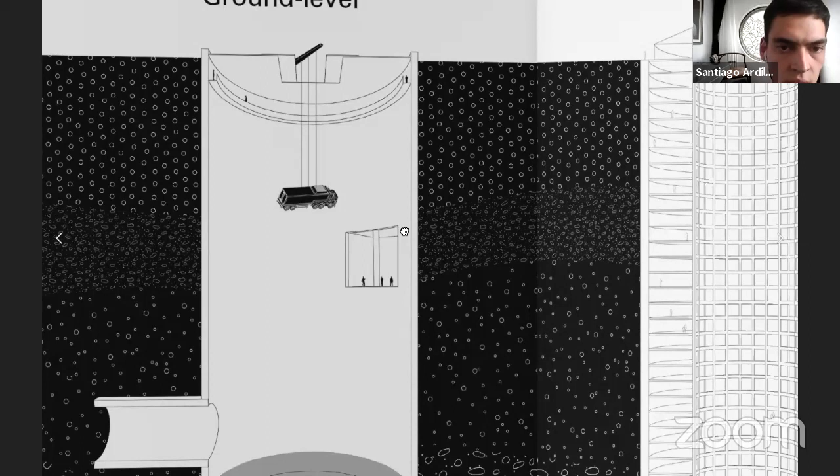To get into detail, for the Kasukabe discharge channel, these tanks are held under pressure, which helps keep Tokyo safe from floods when the sea level rises. They also introduced a truck to carry out maintenance on the tanks.

Then there's the Depth Scraper, where all housing units are put underground, thanks to a mirror on top. Then there's Alice City, with a whole development of houses and commercial uses. And this is my proposal, an artificial speleology project—speleology, for those who don't know, is the exploration or study of caves—where people can come and use this space, taking the main idea of recycling these tanks so people can carry out these activities.

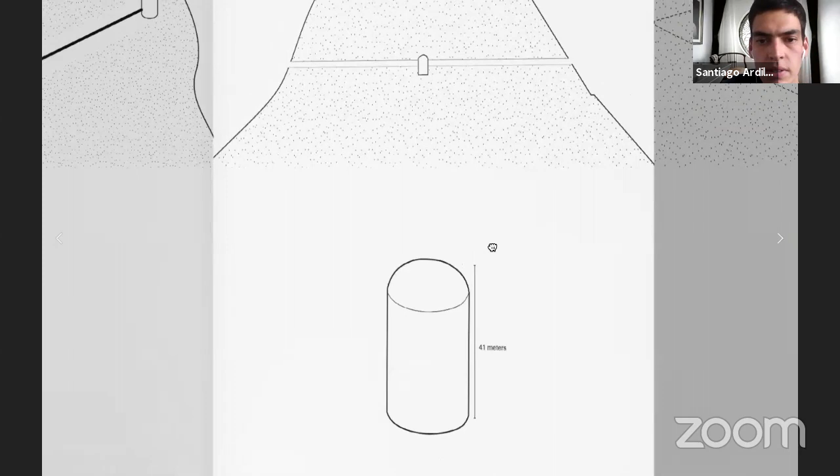Then the last category is the fully buried one, prototypes buried in the middle of Mount Ikeno. This includes the Kagra gravitational wave detector, which is buried 500 meters underground, and then the Super Kamiokande, which is 1,000 meters under Mount Ikeno—you can see it in the section.

Then there's the nuclear waste repository, also underground, very deep, about 600 meters. And then my proposal is to reuse one of these ideas, the Super Kamiokande, and convert it into something else. So again, I'll show more detail on these case studies.

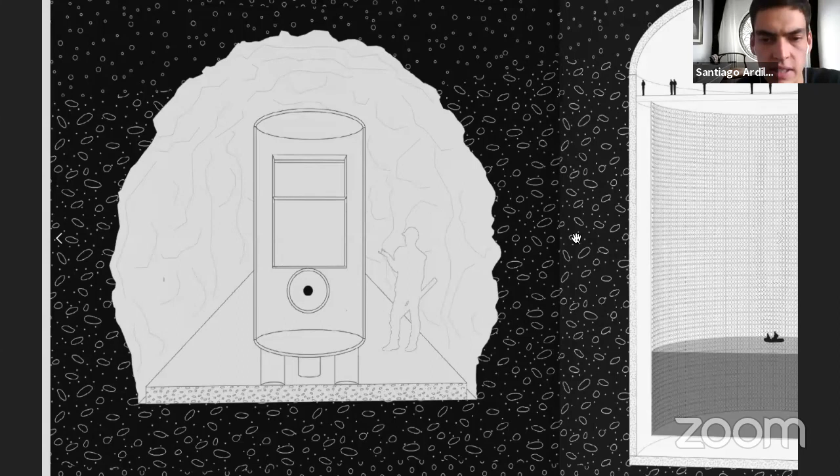The first is the Kagra, where there is some human interaction, and it travels with lasers. Some of these objects are part of a wider system—for example, this one is part of the Virgo or LIGO system with the United States, so they're part of a worldwide research facility. Then there's the Super Kamiokande, a neutrino detector that needs to be underground in order to detect neutrino waves, and people go down to perform maintenance on the water tank.

Then there's the nuclear waste vitrified waste tank, where they vitrify the nuclear waste in order to make it safer and then bury it underground. This will be a speculative project where the Super Kamiokande is reused, because it's already 1,000 meters underground, so it will be used as a message for the future, since nuclear waste is very dangerous. They usually use semiotics to explain to people who find this tank in the future, or future generations, that they should keep away because it's very dangerous and will have very negative effects.

So yeah, in a nutshell, the only environmental and economical solution for the overcrowded Japanese territory is to continue expanding underground, finding new prototypical combinations to utilize unused urban and rural areas. So the three underground spaces proposed transform technical research facilities into inhabitable spaces, as engineering is transformed into architecture, showing opportunities that could improve the underground Japanese territory overall. And that's it.

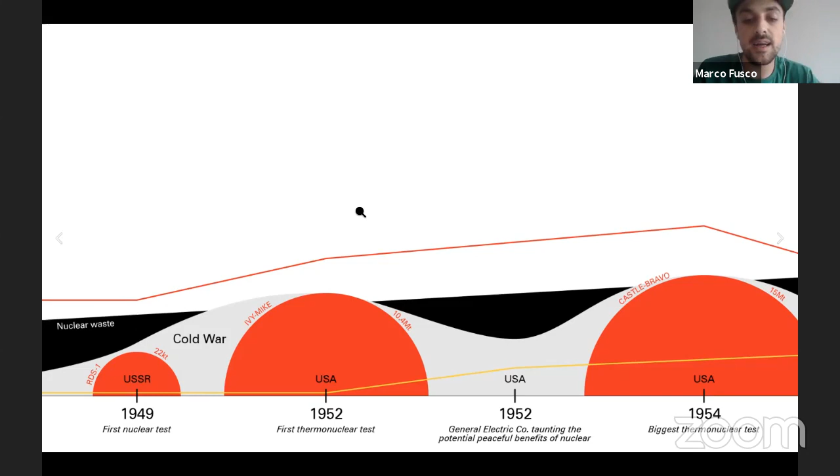Then in World War II, we see how this actually happened with the two bombs: in Hiroshima, the uranium bomb, and in Nagasaki, the plutonium bomb, which escalated drastically during the Cold War. But in the meantime, General Electric was already taunting the potential benefits of nuclear power, and the USA was pushing propaganda to promote nuclear power in Japan. In 1966, Japan built its first nuclear power plant at Tokai.

Then it gets to a point where the world oil crisis happened, and this led to about half of the nuclear reactors being built during that time — a reborn of nuclear power. This continued until the Chernobyl disaster, which put a heavy brake on the development of the nuclear industry. It got back on track again, especially in Japan, where in 2002 it was producing 30% of its electricity from nuclear power, until the Fukushima disaster.

When the electricity generated by nuclear power plants dropped to zero, Japan started a new energy plan, and 24 units were restarted. But Japan is still dealing with the consequences, still dealing with the decommissioning of Fukushima, and dealing with the ever-increasing issue of waste — in this case, water contaminated by radioactive material.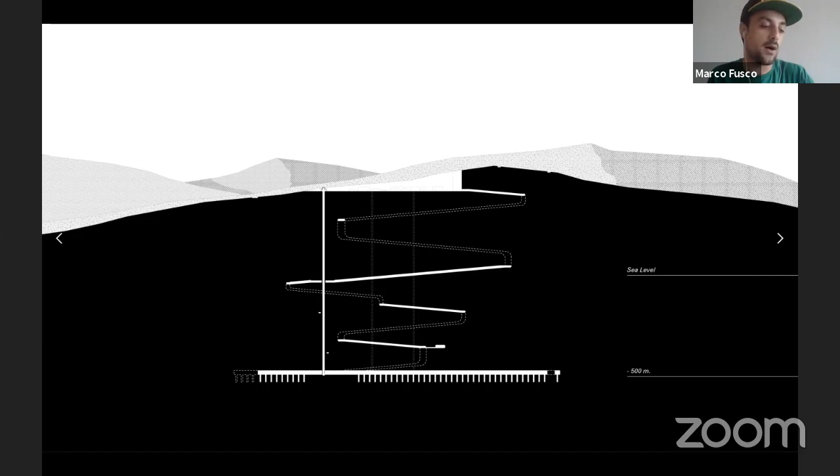This is the Mombetsu nuclear waste repository, located approximately 4 kilometers away from the port of Mombetsu. It's a deep geological site which will store nuclear waste permanently, going 500 meters deep. At -500 meters there's the level where the boreholes are placed, and therefore where the canisters with nuclear waste are placed. This is the entrance to the repository.

This is the control room, which always needs to be there when it comes to nuclear power, because of the vulnerability of the material. This is the canister being bored inside the borehole, and after all the boreholes are filled with canisters, the whole tunnel gets filled. After all the tunnels are filled, the entire geological repository will be filled.

And nobody should actually know of the existence of this place. It will stay there for an eternity, because plutonium has a radioactivity that lasts 80,000 years. So this site would need to remain for at least 100,000 years.